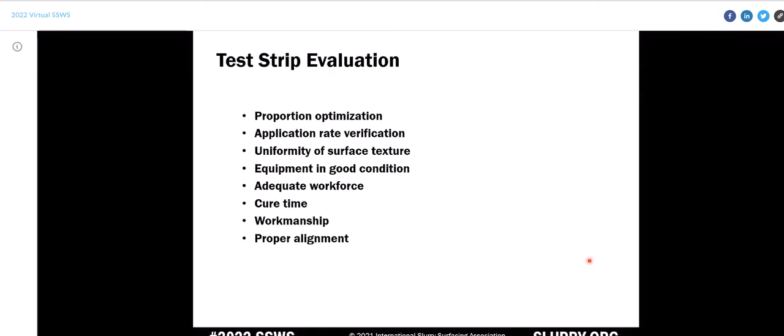So during this test strip is when you can work together with the agency to determine that stuff. But ultimately, the workmanship needs to be good. And then proper alignment. You want to make sure that the joints of the test strip are put on lane lines, and the driver has got a good mark to drive off of to leave a good straight line behind it. So these are just some of the things that you need to consider when evaluating a test strip.

What happens if you have an unsatisfactory test strip? Well, you got to go back to the drawing board. Now that doesn't mean a whole lot. That doesn't mean you have to recalibrate. That doesn't mean you have to do any of that kind of stuff. It just means that you need to go back and identify the area where improvement is necessary, adjust and perform the test strip again, and repeat as necessary until successful.

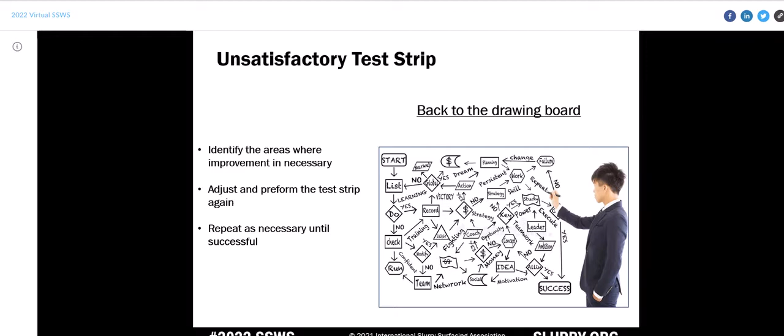Again, I like these test strips to be part of the project itself. And in most cases, let me go to this next slide.

In most cases, test strip placement, evaluation, and acceptance generally take place on the same day and within a short period of time. So if you're doing a 1,000-foot test strip at 8:30 in the morning, you do your 1,000 feet, you stop, everybody walks up and down it, you check your application rate, everybody talks about surface texture, they go through all the evaluation measures and say, yes, this is an acceptable test strip, go to work. Then it's time to go to work and get busy. So that's how it typically happens.

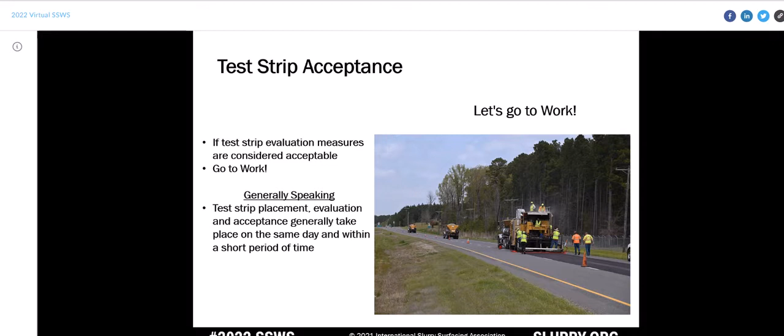Multiple test strips, waiting overnight, doing things of that nature. If that's what you want, you need to make it part of your specification, but please know that keeping these large crews and equipment from working typically costs money. So the quicker we can do that calibration, test strip, if everything's right, then it's time to go to work.

Traffic control. There's several reasons we do the traffic control. First of all, safety of the traveling public, safety of the employees performing the work, product protection. And then when we talk about the traffic control devices, needs are going to vary depending upon the situation.

Now, one thing I like to do, and we see it required in a lot of cases these days, is the requirement of ATSSA certified traffic control supervisors and technicians. It's important to have those guys on the job. It keeps safety as it relates to traffic control first and foremost, and part of the culture of what you need to do. So extremely important.

You see in this picture here, this is an urban arterial. It was actually being done on a Sunday because of the high volume traffic, and you can still see the great lengths the contractor has to go to protect the area in which they're working, and to protect the product itself. If you don't do that, in some cases, people will drive all through it. They'll run between the cones and things of that nature and just destroy what you've just done. So you have to take that extra step to help protect everything and provide a good, safe work zone.

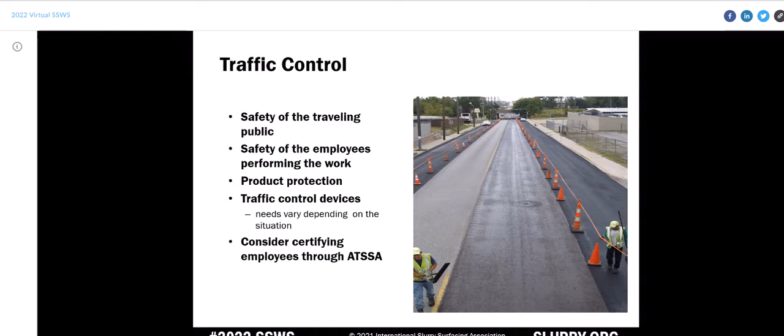All traffic control devices shall conform to the requirements of the Manual on Uniform Traffic Control Devices, known as MUTCD. I believe the highest subscribers to that manual are attorneys, not contractors and engineers. So if you're not adhering to the traffic control requirements within that manual, you leave yourself exposed to legal activities, and that's not a good thing. Make sure you're compliant with that document and any local standards that may be in the contract documents as well.

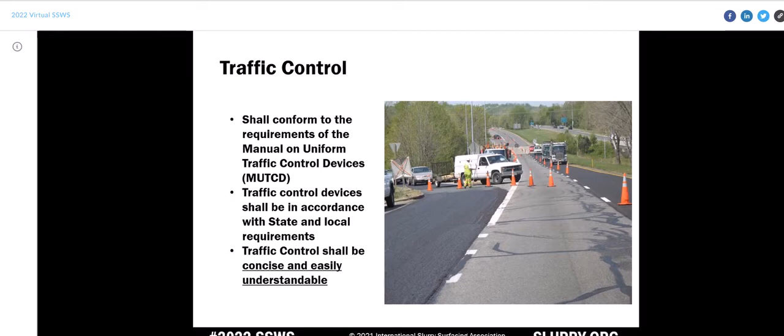Traffic control shall be concise and easily understandable. We've all driven through work zones where you're scratching your head, looking around, and it can be very confusing. It's important that you don't have a lot of conflicting signage.

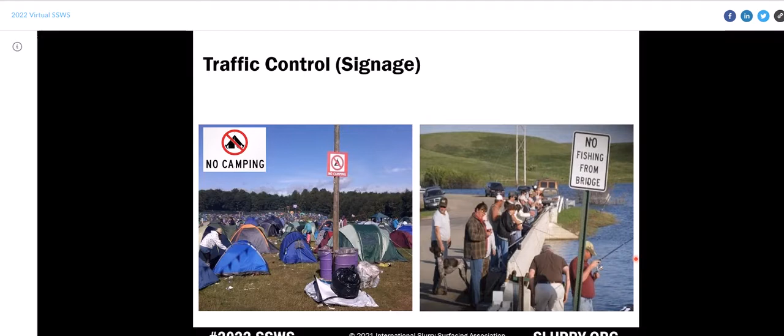In these particular pictures, you can see people adhering to the signage that's been put in place. Sometimes that's what it feels like when you're out there working on the roadway. But this is just a little levity in the middle of a presentation - when they say no fishing from the bridge, you'd think people wouldn't fish from the bridge.

Another thing - being concise and not conflicting. How can you have a stop sign that also says no stopping at any time? Which one do you pay attention to? And this sign right here, not really sure what directive that's giving you, but it's very confusing. So we don't want that.

Again, clear, concise, use good devices - don't let them be worn out, covered with dirt, dust, and asphalt. This is what protects your people and protects the traveling public, so you want to put a lot of effort into it.

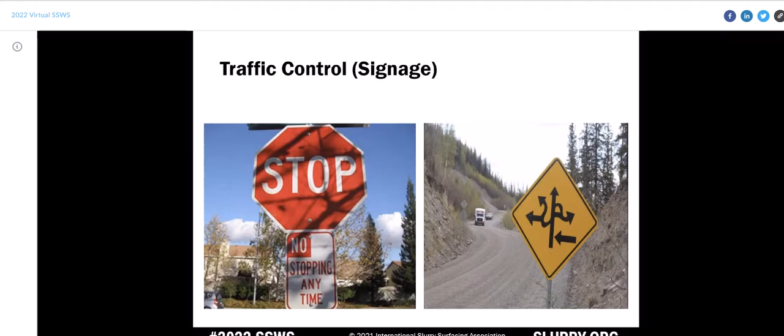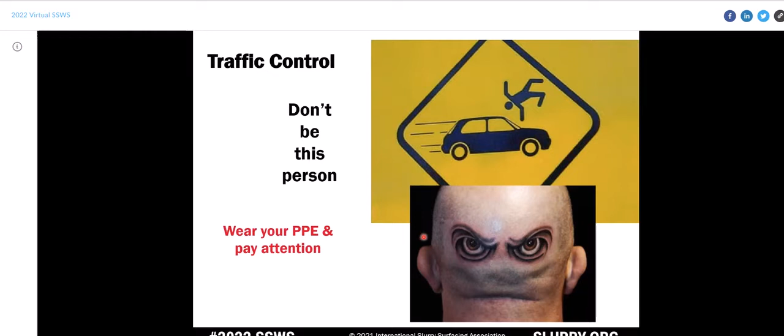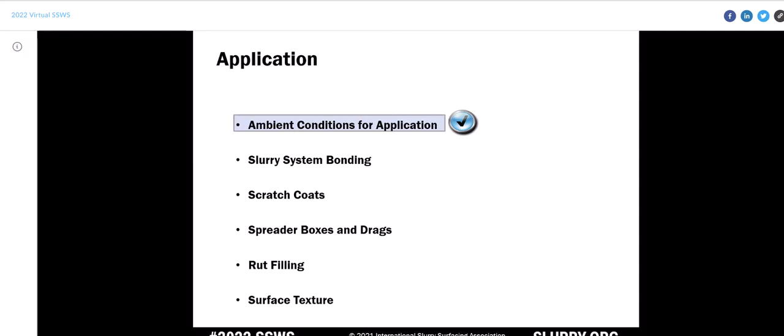Let's talk about application now. We're going to cover a few different subjects within this, and within the design and inspection manual there's a plethora of different subjects. We've had to cherry pick for this presentation, which is about 3 hours - we probably have more like 12 to 15 hours worth of information if you put it all into presentation form. So the advantage of getting that document in your hands is really important, so you can see all the different scenarios and twists and turns within it.

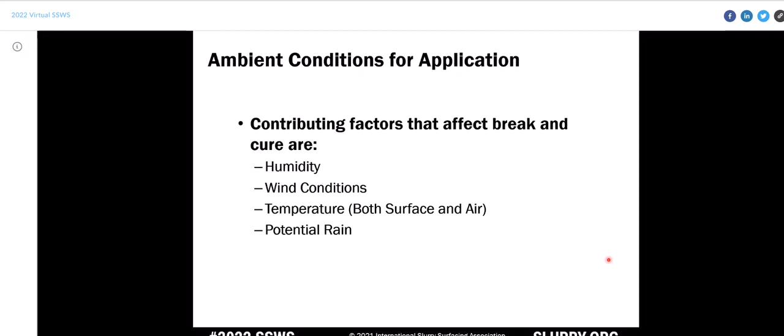Let's talk about ambient conditions for application. Contributing factors that affect break and cure include humidity, wind conditions, temperature - both surface and air - and potential rain.

Slurry surfacing material, which is slurry and microsurfacing, shall not be applied if either the pavement or air temperature is below 50 degrees Fahrenheit and falling, but may be applied when both pavement and air temperatures are above 45 and rising. No slurry surfacing shall be applied when there's a possibility of freezing temperatures at the project location within 24 hours after application. The slurry surfacing shall not be applied when weather conditions prolong opening to traffic beyond a reasonable time.

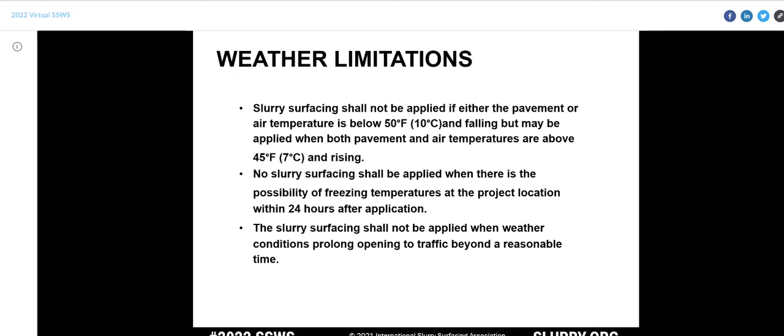Humidity can potentially slow down the rate of breaking and setting of the slurry surfacing material - potentially. Now, those of us who work in high humidity areas and have dealt with material sources for decades have a pretty good handle on this. Humidity doesn't typically have an enormous effect - we know how to formulate our emulsions, mix designs, and job mix formulas to contend with that. So typically not a big deal.

Wind conditions - a slight breeze is always advantageous. It's great for the workers too, rather than not having a breath of air out there. Less humid conditions with a breeze may accelerate the breaking because that water has a place to go now, and it also helps speed up the setting of the slurry surfacing material.

Temperature, both air and surface - minimum 50 and rising. That's always important. Work should not be started if freezing temperature is expected within 24 hours. That's the key, that's the rule of thumb right there. Some specifications in different states may vary slightly from that, but it's pretty much a good industry standard.

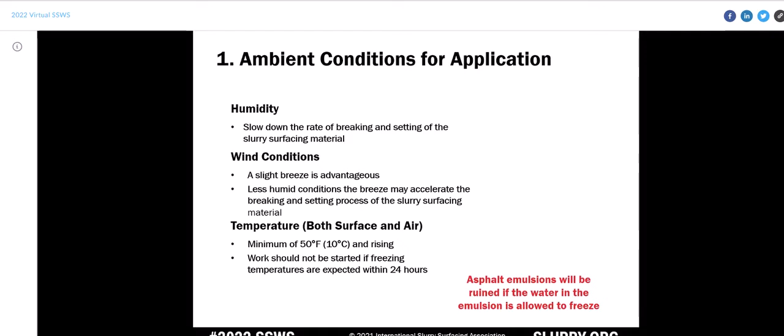It's also important to know that if you're dealing with and flirting with freezing temperatures, asphalt emulsions will be ruined if the water in that emulsion is allowed to freeze. You'll have a big mess on your hands. Don't push the envelope trying to put these treatments down in weather that's not conducive to producing a product that's going to give you great performance.

Potential rain. Work shall not be started if rain is imminent. People often ask me, what does imminent mean? Well, if it's about to rain, you don't need to put it down.

We do have quick set materials these days, and microsurfacing will resist rain-induced damage after about 1 hour of being applied, depending upon the amount of rain you may get and how quickly you have to put traffic on it. So everybody these days has radar and weather on their cell phones.

Keep an eye to the sky, and just err on the side of caution. The last thing you want to do is get out there and create a mess, have to redo things again. So just be prudent, work with the agency, and ultimately the contractor is responsible for providing a good project.

And if he makes a bad call and gets hung in the weather, then it's going to cost him. He's going to have to go out and make those repairs to the satisfaction of the agency he's working for.

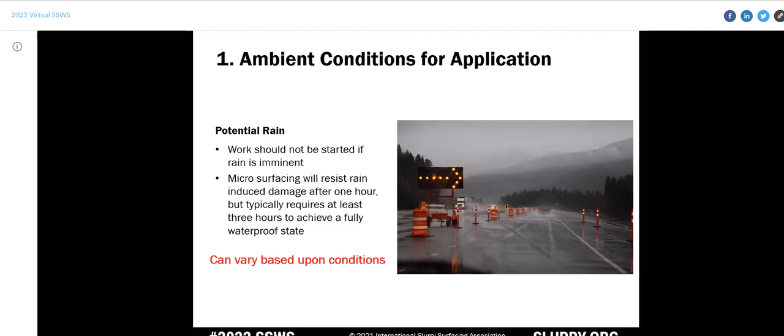Now, this slide is really just an example, or maybe a way that I can explain how temperature can have an effect on cure times. Now, this is really based on emulsion temperature and not the environmental temperature. But again, I'm trying to illustrate what can happen with temperatures.

So you've got available mix time up the left side of your graph here, and you've got emulsion temperature here. So if you're looking at 150 degree emulsion here, you're only going to have less than probably 35 or so seconds of mix time. Now that's a hot emulsion, and we typically don't receive them on the job site at that temperature.

But it does show you, because of that heat in that emulsion, we're going to have a much more reduced mix time availability. Now, if we get back over here to 110, you see that time is increased up to 150 seconds of mix time. Now we're getting more in the ballpark. So that's a good thing.

And then if we get over here to 90, look, we're all the way up to 300 seconds. So no doubt in my mind that 300 seconds worth of mix time, contractor can adequately mix and get that material placed without any trouble as far as temperature relations go.

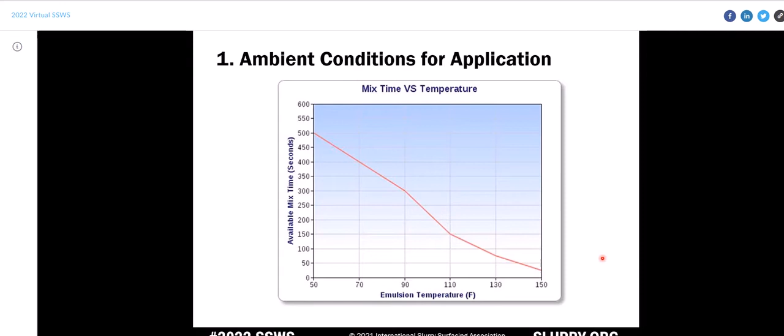So please know that stuff in that low-lying area with the cooler pavement temperatures and no sun is going to cure slightly different than that you find in full sunshine. So just an example of what you may see out there in the field.

Okay, slurry systems bonding. Again, as I mentioned earlier, if we can't bond to the existing pavement, we're not going to perform. That's just the bottom line. It will never, ever work, not in a million years, and that's true for any thin non-structural surface treatment. It doesn't matter whether it's a chip seal, a fog seal, a thin overlay, a slurry, or a microsurfacing. If we're not bonding, we're not performing. So the integrity of a slurry system treatment is ensured by creating that strong bond to the existing pavement.

And sometimes to help with that, we pre-wet the existing pavement. Now, I'm not going to say that's a hard, fast, 100% of the time rule, but I'll say that more often than not, it is the rule. The whole idea here is to settle any possible particulates that may still be out there. It also helps break a little surface tension with the existing pavement and ensures that bond. It also helps, and this may be a bad word in some people's book, but I think it helps with what I like to call drain down.

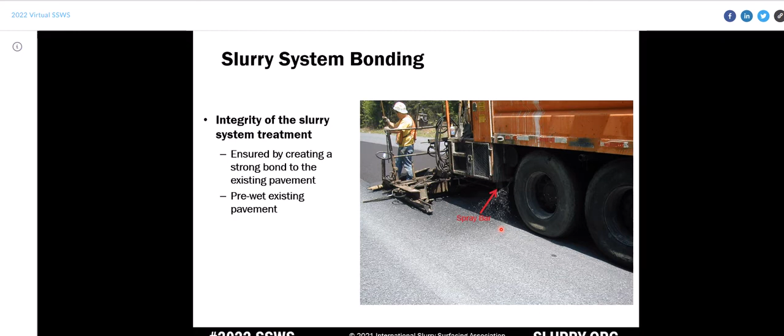So this is a product that doesn't get tacked, so it requires some emulsion from the mix to slightly drain down to form that membrane and bond with the existing pavement. This dampening of the pavement definitely contributes to that and aids in a good bond.

Again, another video that's not going to work here, but you can see how slight dampness under this machine, not ponding water, not rolling water, just slightly dampened, helps not only cool that pavement slightly, but it's going to help with that bond.

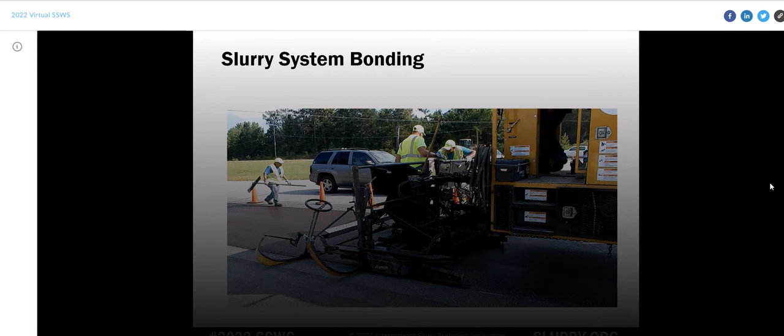Okay, let's talk about scratch coats. Now, this is only with microsurfacing. When we talk about leveling, we cannot do it with Slurry Seal. Slurry Seal is designed for 1 stone thickness. Microsurfacing, you can stack stones and do leveling, which is done through either a scratch course or a rut fill.

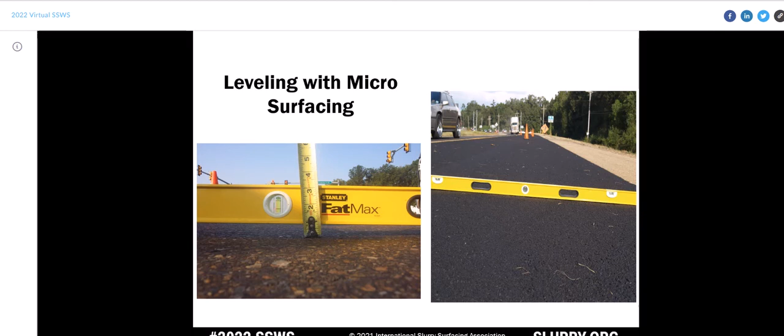Let's talk about scratch coats first. They're used only with microsurfacing to level pavements with minor transverse irregularities that are narrower than the width of the spreader box, or on pavements with longitudinal ruts less than 1/2 inch. So with a scratch course, if you're at 1/2 inch or below, that's what you want to use. If you're over 1/2 inch, then you want to use a rut box.

You can see here in this picture on the left, scratch course being applied. Back in the day, typically the scratch course was laid just narrower than the actual lane width itself. Some people have modified that application process, as we have, and we do full width scratch courses now, trying not to do the narrower process because at times that could create a bit of a ponding issue down the roadway. Not a bad way though - some contractors can do it, some prefer not to.

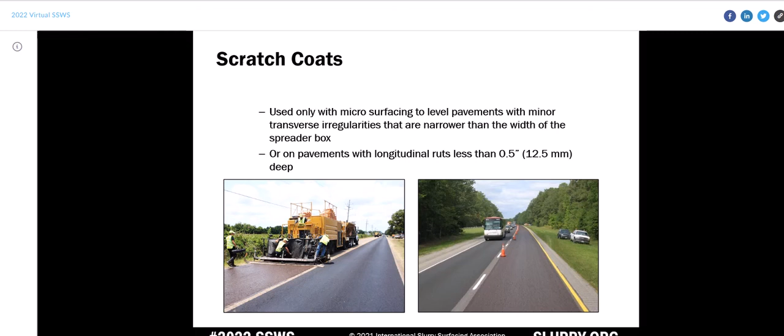Scratch courses are used to correct minor transverse and longitudinal pavement deformation, and again should only be applied with microsurfacing. One of the big differences with a scratch course over surface treatment is you use the same spreader box, but you use a different screed in that box. We want a rigid strike-off screed - in a lot of cases some people use metal strike-offs or screeds, some use very rigid polyurethane strike-offs. We typically use the urethane ones. They seem to work very good.

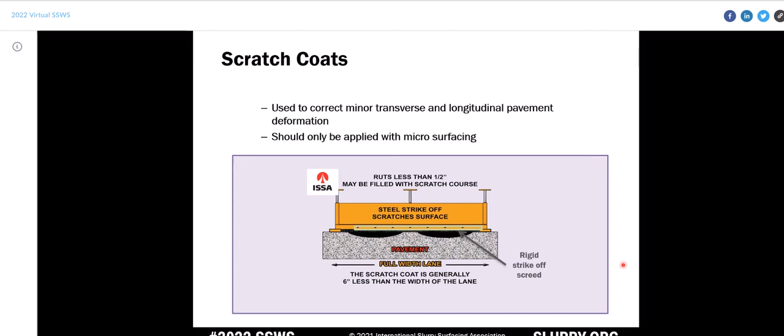The whole idea of a scratch course is to scratch or wipe very thinly the material in the high parts of the roadway that I'm pointing at right there. One of the main things we want to remember is we do not want a lot of buildup on these high parts. If we build up a lot of microsurfacing material on those high parts, ultimately what we've done is we've exaggerated the rut depth of that rut and required more material to be used to fill that rut.

Well, that's not a good process. Our material per ton is extremely expensive - maybe not extremely expensive, but it's expensive - and we don't want to overuse it if we don't have to. So we do not want to exaggerate that. We want to scratch here, wipe it as thin as we can.

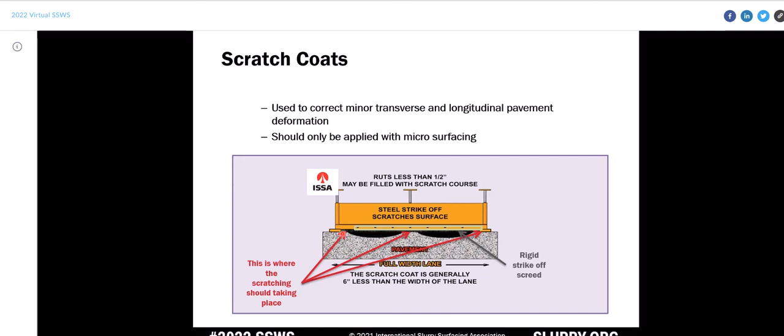A lot of times when we do that, we leave little scratch marks out there on those high spots. You may see a little bit of surface texture difference between what's applied here and what's applied here, but that's going to be taken care of when the final surface treatment is put over the top of it. So again, scratch here - don't let that material build up because it's going to require yourself to use more material.

During the placement of a scratch coat, individual pieces of aggregate - this is what I was just talking about on the high spots - may be caught by the spreader box and pulled along the road surface, creating drag marks. I like to call them more scratches because they're not very deep, since the material is not very deep. This should be expected between wheel paths and on high spots. When the surface texture of the existing pavement is non-uniform, the surface of the microsurfacing will also be non-uniform. Therefore, a scratch course may be needed prior to an application of the final surface to create a uniform surface texture as the final project lift.

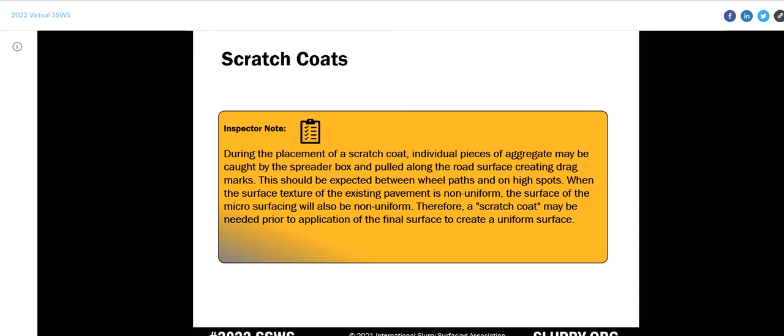Use microsurfacing as a rut filler when the pavement is structurally sound for the future traffic over the expected life of the microsurfacing. When ruts were caused by mechanical compaction of the pavement structure. When ruts are flat, not sharp, and showing dual wheel marks - don't want to use it in that case. When ruts are indentations only, not an indentation between upward heaves. You only want to use it when ruts do not contain fatigue or alligator cracking, and when ruts are not caused by base or subgrade failure.

So really the purpose of this slide is to reinforce to the designers that they need to do their due diligence in picking candidates for rut filling. Microsurfacing is a fantastic rut filling material when used in the proper application.

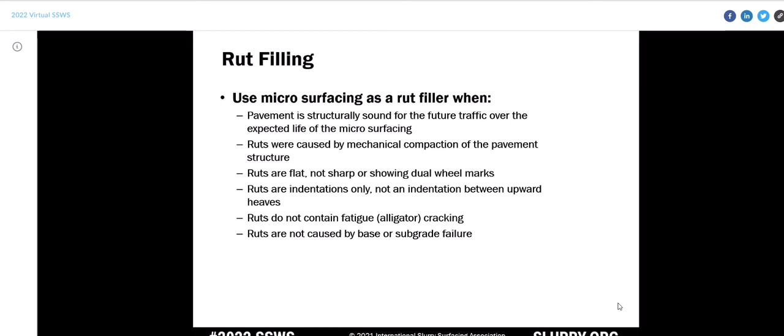If required to put these materials in areas where you've got pushing and shoving and ruts that came on quickly to an asphalt pavement, in the second or third year, things of that nature, those are red flags that may indicate it's not a good candidate for this process. So again, do your due diligence. If you're unfamiliar with where a rut filling treatment may work good for you, don't be afraid to call an industry contact. There's technical advisory committees and things of that nature that you can find at slurry.org. We've got great technical support, and we always have somebody close by that can come out and take a look and give you some advice on a roadway as to whether it would be a good candidate for rut filling or not.